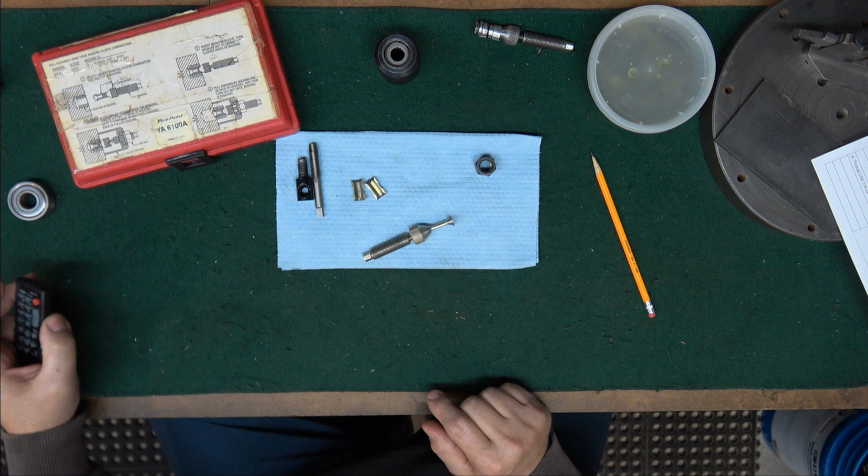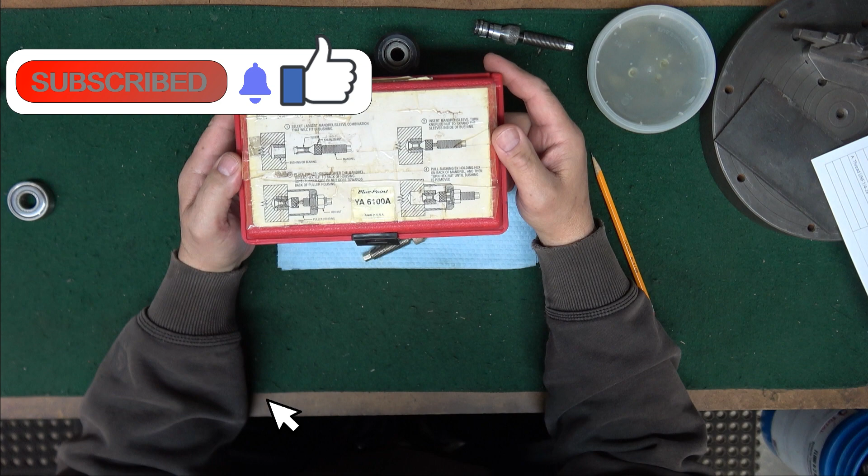So what we have this time is yet another tool repair. So I have this set right here. This is actually from the school. It is a Snap-on tool, or to be more precise, a Blue Point tool, and they don't make it anymore.

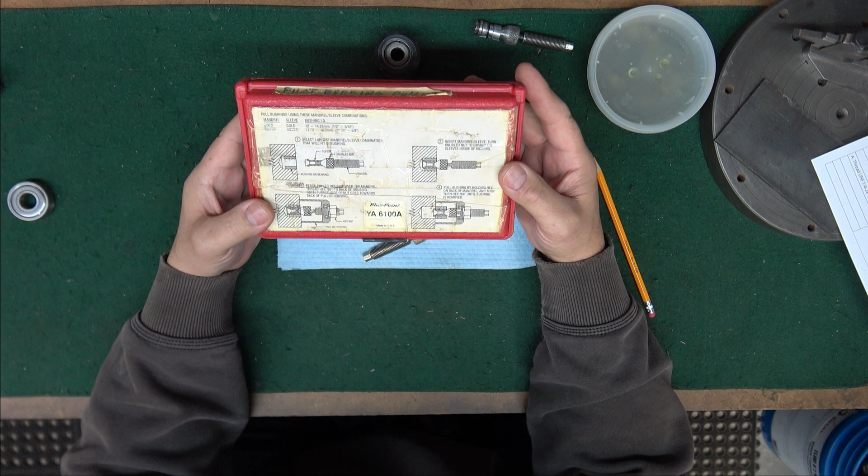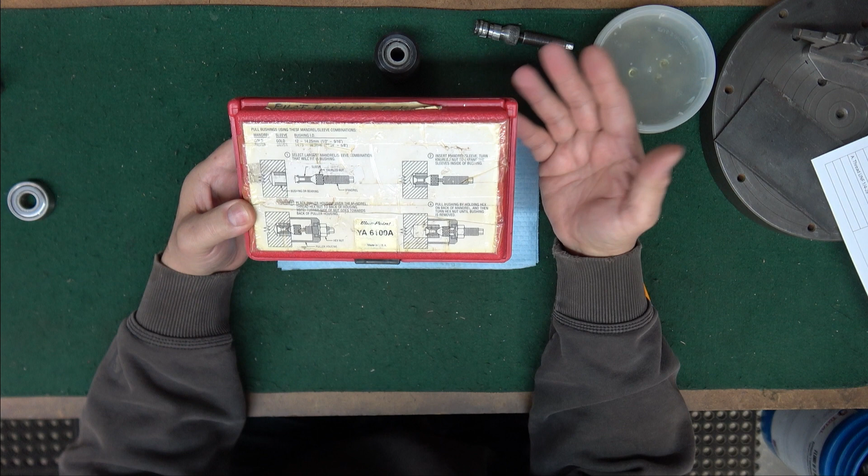So most of you guys realize that if you buy a Snap-on tool, Blue Point, they'll replace any of the broken components for life. But when it comes to a component that's not available anymore, then you have the option of an upgrade or the tool that they have at the time. So this is a bearing puller, specifically for pulling pilot shaft bearings out of the end of crankshafts.

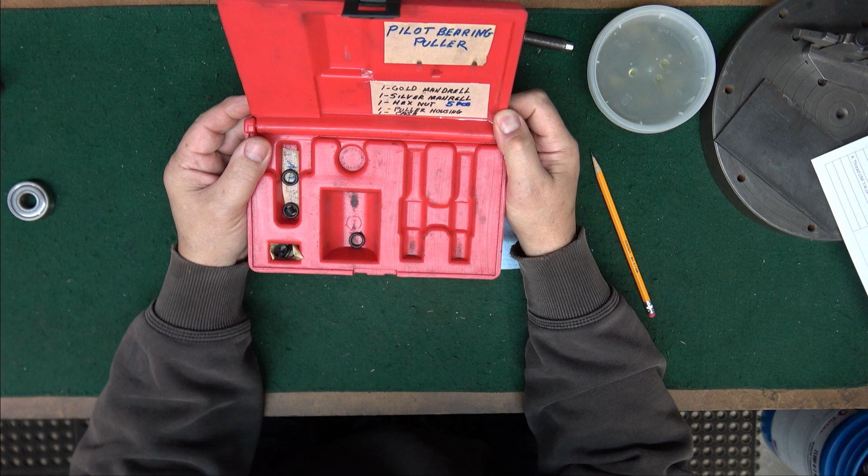So the instructor that does a lot of the transmission classes was working on a clutch job with his class, and they went to use the pilot bearing puller, and somebody had their way with it. So if you take a look at this and I turn this, you can see it's bent. Well, this was bent like this earlier.

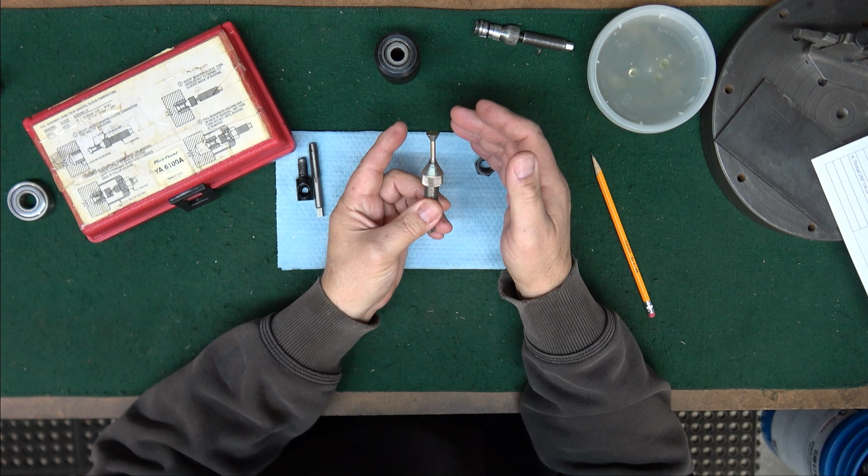This threads down right here. In order to get this apart, I had to straighten it with a hammer to straighten it out a little bit. And when I did that, I could feel the metal fatiguing, kind of like getting softer. Kind of like when you're tightening a bolt and just before it's ready to shear, you feel that soft, the oh God, it's going to snap moment. Well, that's where we are with this right now.

I straightened it out enough to get this to come up far enough so that I could remove this, because it's threaded into this part. But it's never going to perform the function that it's designed to like this. I don't know how this got bent. It really doesn't make much sense, but you're working with students. Students are learning. Sometimes they get a little overly aggressive with tools.

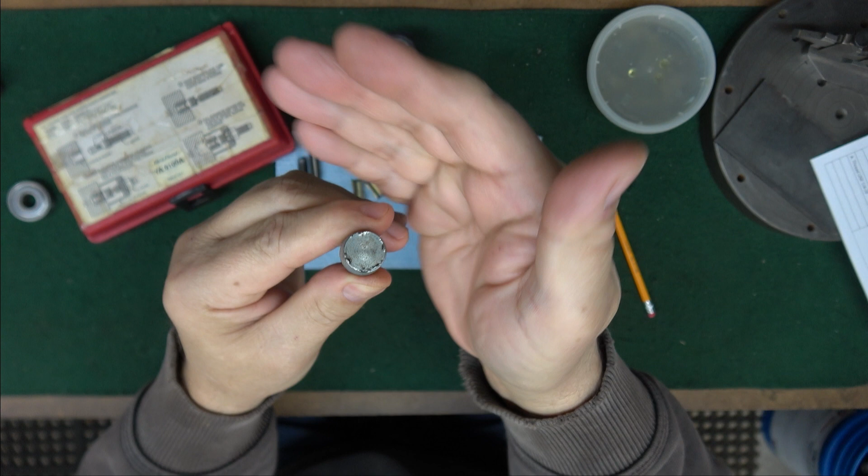The other thing is, if you look at the end of it, somebody's either put it in a vise or vise grips or something trying to separate this, and I will tell you this was very hard to separate. Here's another one in the box because it's two different sizes, and if you look at it, this is how bugged up the other one was. I just kind of filed it a little bit, and I grabbed it with a set of soft jaws to unscrew it, and it's in there pretty tight.

So how this works is it has a couple of different parts to it. It's nothing more than an expanding arbor. So you have these two little parts right here that have an elastic around them, or an O-ring, and they fit between these two angles, and as you drive it together it expands.

So if I had a bearing something like this in the end of a crankshaft, or in a blind hole, something like that, I could put this in here and I could adjust this until, once it finds that inside diameter, you snug it down. You don't have to be too tight, just snug it down. There is a lip on this component that it expands bigger than the ID of that bearing. So now it's locked in there

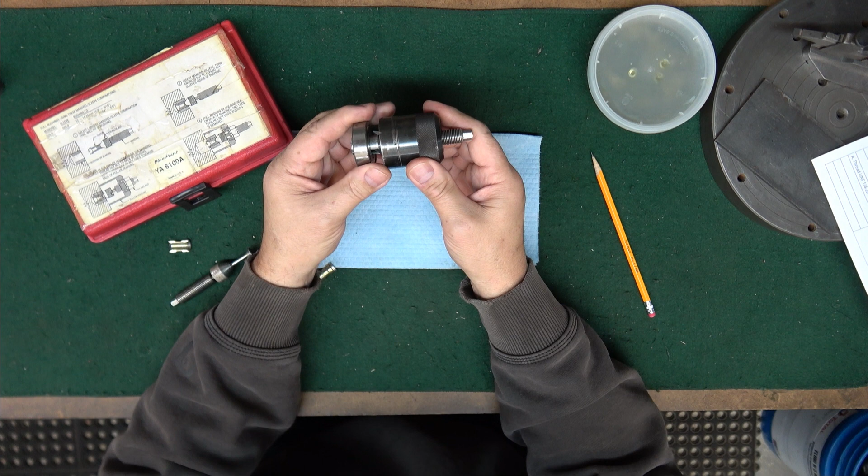and it's grabbing the backside of that bearing, the inner race. You take this component, slide it on, and then the nut, and you screw this down, and what it does is it draws that out.

Now there is another cup for this specific one. This bearing is a little bit larger than what you would normally see in a pilot bearing, but you get the idea. So it would pull it right into that cup. Okay, so they bent it, they fatigued it, we can't get another one.

So we searched around trying to get just that component. So these are the pieces for this particular one, this size. I unscrewed it from here, and I'm going to tell you, it was in there tight.

And what I found was there was a little metal piece in there, and I'm not sure what that's for. I don't know if that's to allow this to go down further and shorten it. I don't know, but that's what was in there. When I pull the other one apart and make one for the other one, we'll see what happens. But it just threads down in there, and that's all there is to it.

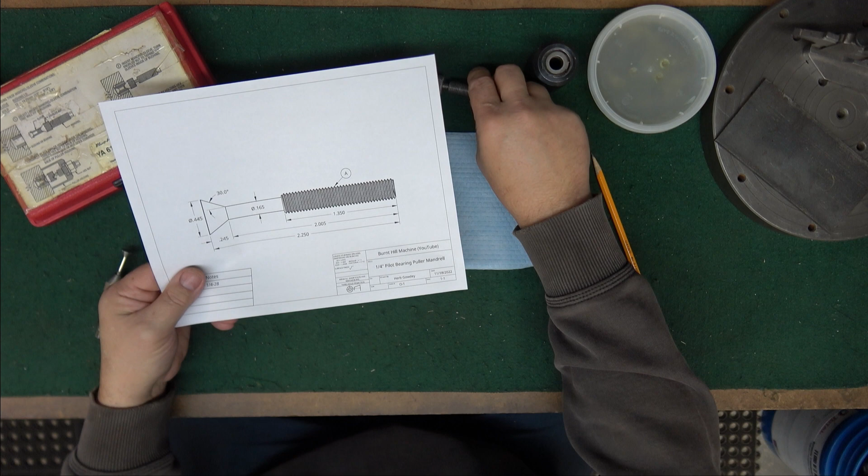So this is bent, and we got to make a new one because we can't buy a new one. And it's too soft to use. I think at this point in time, if I bend it some more to get it straight, which I probably could, it's going to fatigue enough to crack. Because I mean, it was bent over like a 30-degree angle. It was pretty bad. So what we're going to do is we are going to make this screw, and it's a pretty easy project.

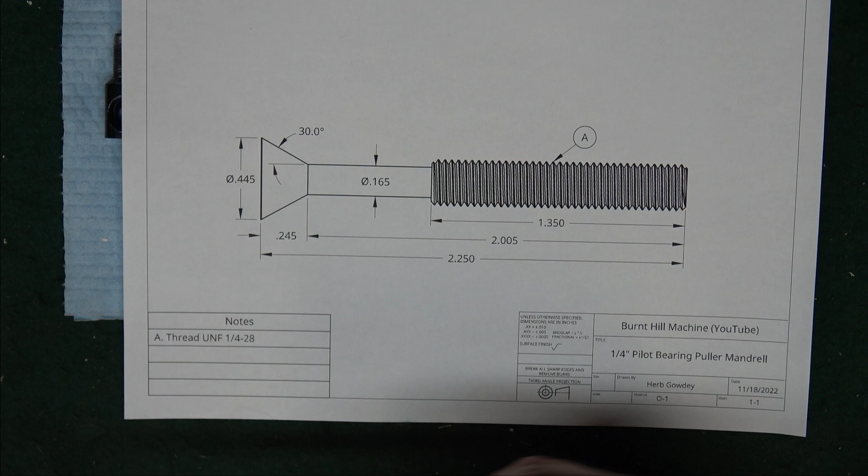So it's going to be about 2 1/4 inches long. It's got a 30-degree angle to this plane, 60-degree included. This is a 1/4-28 thread, simple. I'm going to use a die to thread this. I don't like single point on small components unless I absolutely have to. To me, there is no reason. This is a production part.

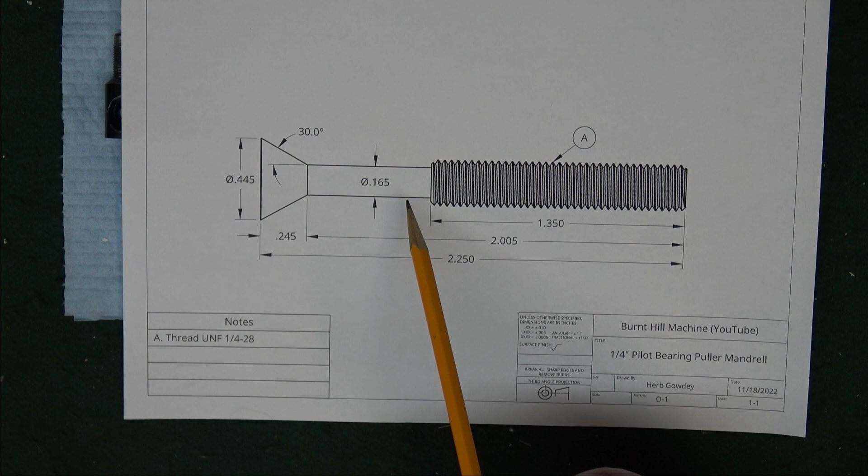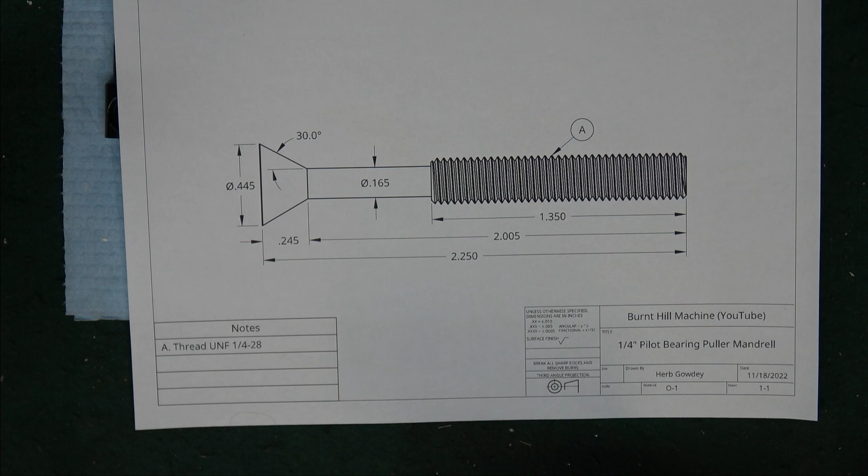And then we're going to put a little recess in here for those little fingers to sit in. So I took all the dimensions. I don't think anything on here is super critical. It's going to be pretty easy. In fact, I'm going to make this angle right here with the tool. So I'm going to use, I don't know, maybe a WNMG insert. When I come in, plunge in here, I'm going to cut this, and I'm going to make that angle all in one shot. Okay, I'll step it, then I'll come over and I'll clean it up.

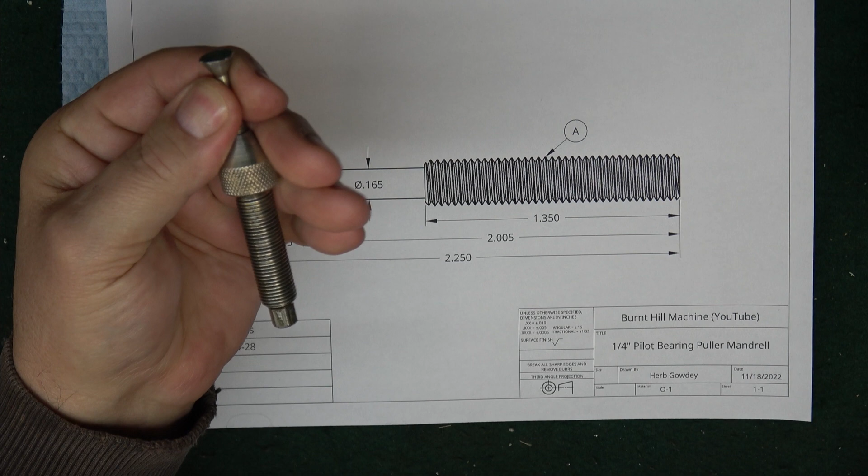It's made out of soft steel right now. It is not hard at all. I found a piece of W1, so it's water quenching tool steel. So I think what I'm going to do is I'm going to make it out of that. I got a piece of 1/2 inch. This outside diameter right here is 445 thousandths, and it's small enough where it'll drop into roughly a 1/2 inch bar with no problem.

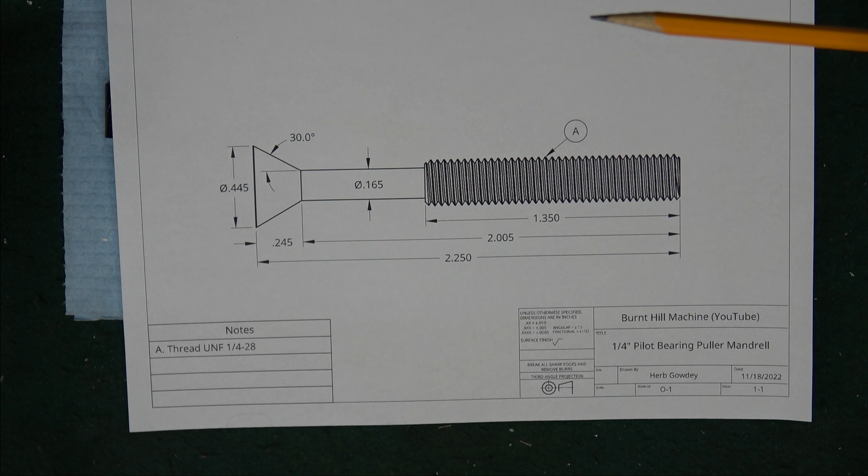So I'm going to make it out of the W1. We'll turn it up, thread it, and then we'll heat treat it and dunk it in some water. Okay, pretty simple. It should be stronger than the component that's here. It's going to work better than the one that's here because they tried to use this and it just wouldn't center up right, for obvious reasons. So we're going to try to get it back to them so that they can do this job nice and easy, and the car will be on its way.

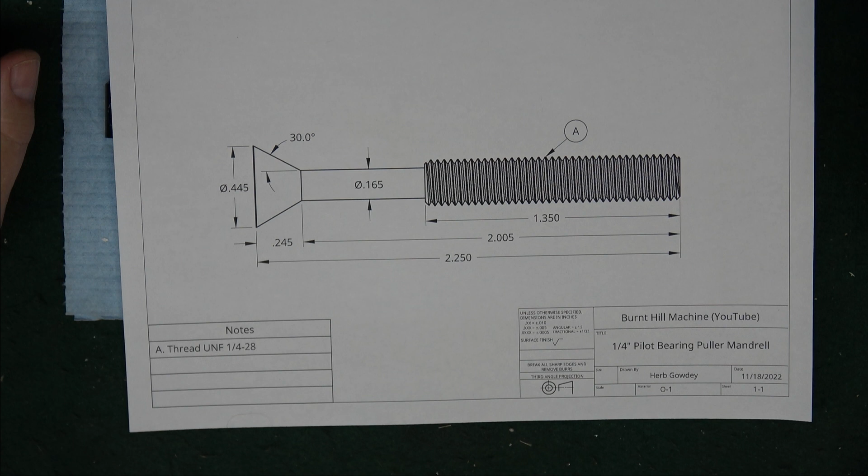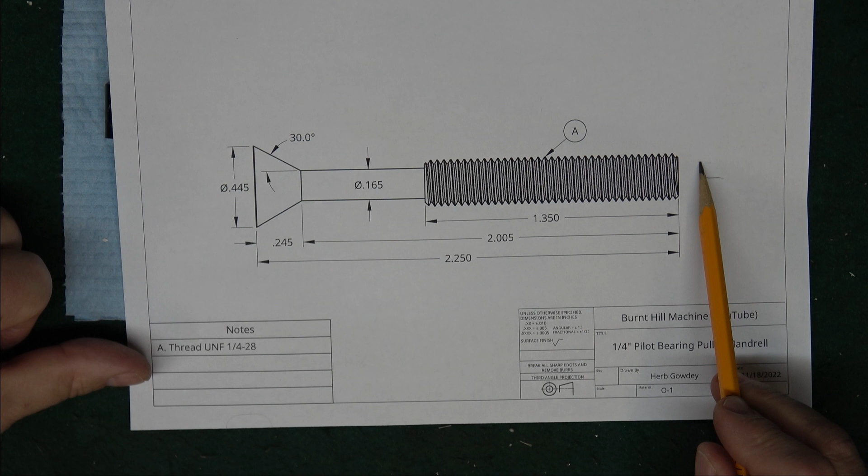Okay, so next time I see you, we'll be over at the lathe, and we're going to set this up. And I'm going to do the same thing I did when I was turning the screws for my little toolmaker's clamp. I'm going to put a center in here because I'm going to hold it. And I'm going to turn this first down below the root of this. And I'm going to hold it with my center here. And I'm going to turn that first, only so I don't have to keep plunging that when I'm cutting this.

Then once I'm done, this is 1/4-28, I'll put this in a chuck, or in a collet, and then I'll face that off. It just makes it easier to work with than to try to keep plunging in and leaving this piece out here where the center is.

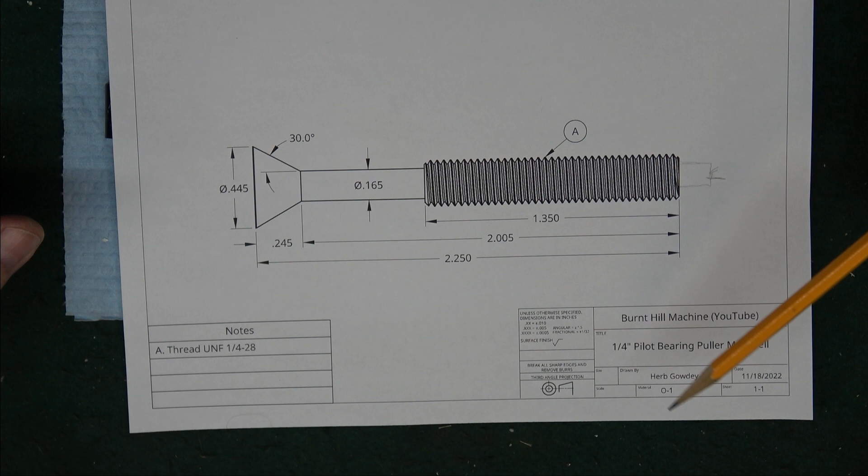And I want support because you guys know that when you turn something, especially this long, 2 1/4, and it's going to be sticking out a little bit more than that, it's going to try and flex on you when you get down smaller. I mean, it's 1/2 inch now, and it's going to try and flex. When you get down to around the 1/4 inch, it's going to flex like crazy. So I want to keep a center in there, and we'll just face that center hole away later.

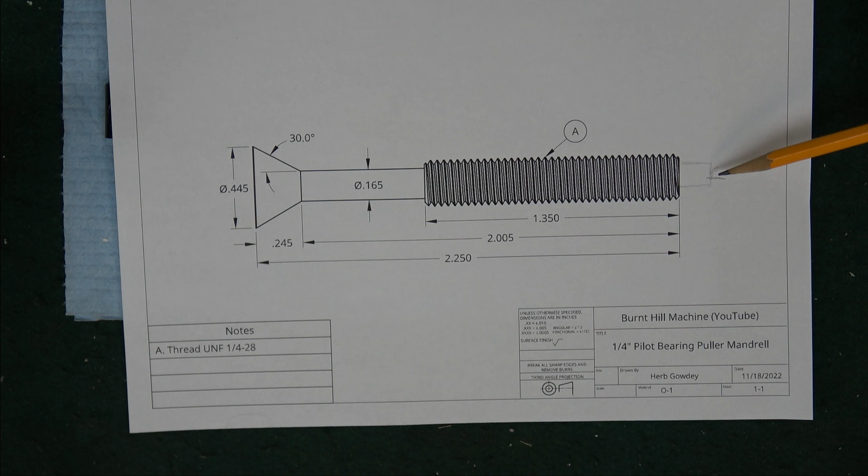So I got it set up in the chuck right now. It's sticking out a little more than 2 1/4. I'll come in here, I'll face it off. I'll put a center drill hole in it, and then I will turn it down and put the center in there and hold it and finish up the rest of this.

Okay, so I'll just be gentle. This is no precise size, I just like it under the root diameter of a 1/4-28. Even if it wasn't there, if it cut it with a tap, it really doesn't matter. I just want it smaller than the OD, so I don't have to keep plunging. Okay, so next time I see you, we'll be over at the lathe.

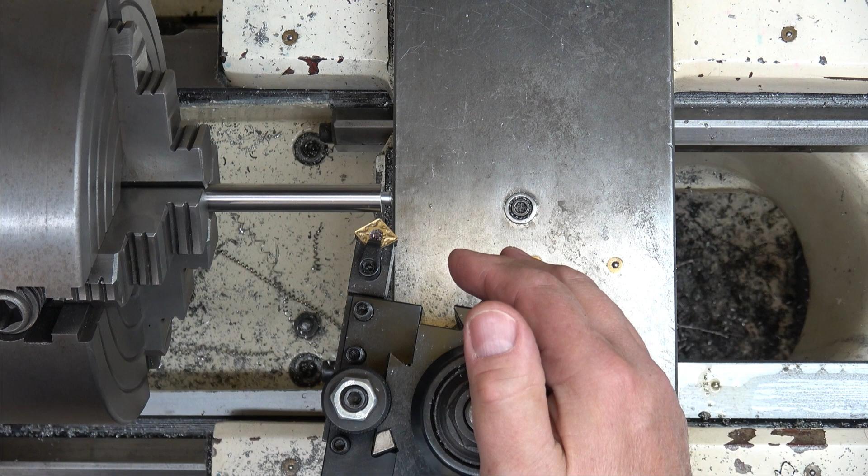Alright, that'll give me clearance so that when I start cutting this down, I should have plenty of room. Okay, it's going to take too sharp of an angle with the WNMG, so I'm going to use a CNMG cutter. And right now I got it set, so this is about 30 degrees, pretty damn close. And I'm just going to use that to make my angle.

This should go back 2 inches. And like I said, this is nothing critical. It's just an adjustment screw. So I'm going to stay just short of 2 inches, and I'll finish that up once I get most of it all machined away. I'll come up and I'll touch it and make it what I want. So I'm going to come just short, maybe a 32nd or so.

Right about there. Give myself a line. All right, let's give ourselves a line.

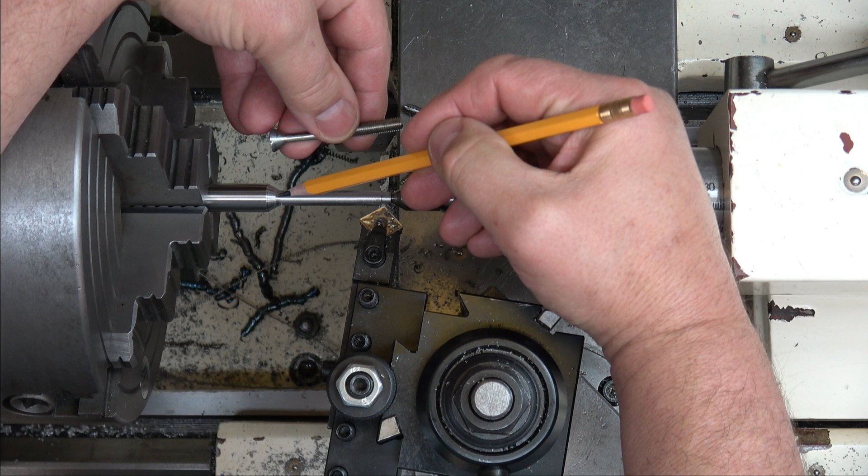So as you can see, I made a little bit of a bozo move. Nothing big. So when I put my line right here, I took the edge up to it rather than the point. Because when you start cutting it, it disappears. So I should have done it a little bit differently. So what I'm going to do, before I get down to my finished cut, I'm going to have to put some layout dye on here. I'll put a mark and I'll come up to that with the edge of this. Okay.

Can't believe I did that. It was stupid. Alright, so we're going to come up to here. And again, we're going to leave it just a little short. Like a little mark here.

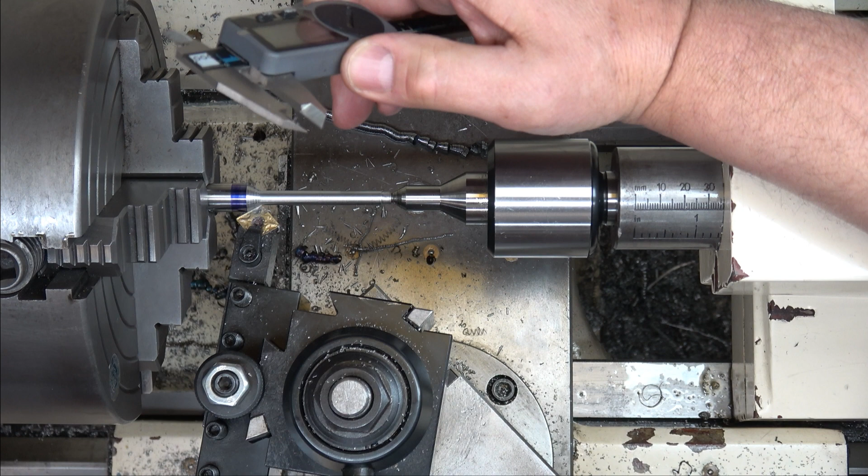256. So like I said, I'm going to bring that about 5 under. It gives me another 10 thousandths pass, so it's going to give me a nice clean pass. And if it's not quite 5, I don't care. I just want to be a little bit under a quarter inch. So 256.

See what we got. What? 248. So we're not even. We're 1.5 thousandths under. I'm okay with that.

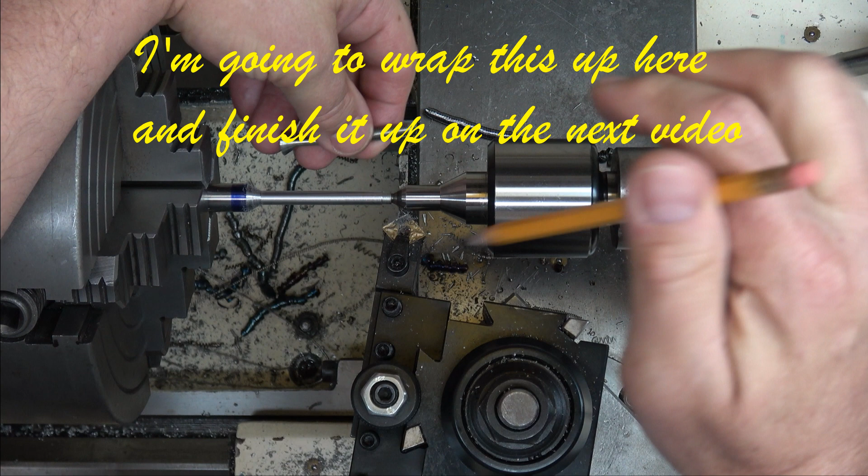All right, so we have to come in here and we have to put this undercut in. And again, this undercut, I mean, it's not critical because it's all relief. It's just so that the unit will close up enough to get through a hole. So we are plenty long enough.